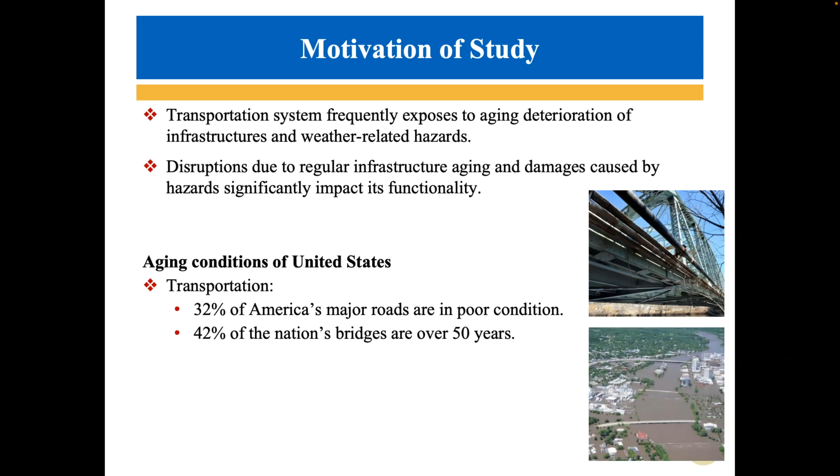So here I list 2 aging conditions of the United States. The first one is that 32% of the American major roads are in poor condition, and also 42% of the national bridges are over 50 years old. And also the focused hazard of my study is the flood. That is because flood is known to be the most frequent and costly climate-related threat. And it has resulted in 47% of natural disasters worldwide. And also it has influenced 2.3 billion people worldwide.

Flood also induces lots of adverse impacts, such as the direct damages of roads and bridges, and also the indirect impacts, such as the traffic capacity reduction, the travel time delay, the change of traffic habits, and the occurrence of traffic accidents. And last but not least is the occurrence of injuries and deaths every year.

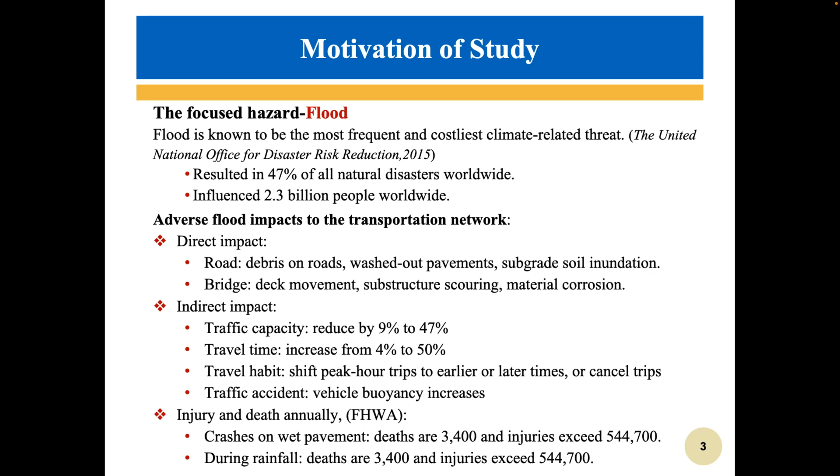So here, based on the aging infrastructures and the climate-related hazard that is flood, we want to manage the risk. The reason why we want to manage risk rather than the disasters is because managing risk is inherent to human development by considering the social and economic activities. So here we commonly do the three branches of risk management. The first is the risk mitigation, the second is the post-event recovery, and the third is the resilience management that can merge mitigation and recovery together.

Of course, the resilience management must be the most effective, but it will also need a lot of effort to do the optimization. So here I will first introduce the transportation network resilience. That is defined as the capacity of the system to absorb shocks, that is the robustness ability, and to adapt to changes, that is the redundancy ability, and to be able to return to a target network functionality level in time, that is the rapidity. And also the speed of the rapidity is dependent on the resource availability. So that is the last feature of resourcefulness. Since we want to do the resilience management, we developed the resilience management system, and here we would like to take two parts of actions.

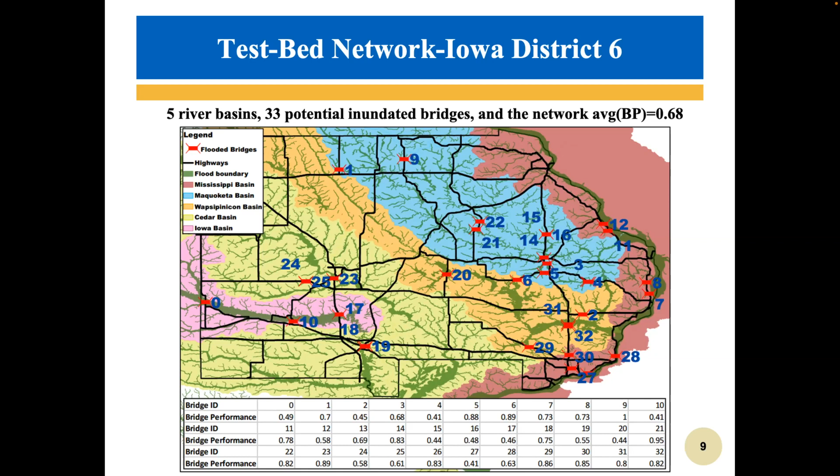We also simulated the bridge condition with the bridge performance value in the range of 0 to 1. So on average, the network resilience, or the network bridge condition, or the network-level bridge performance, is equal to 0.68.

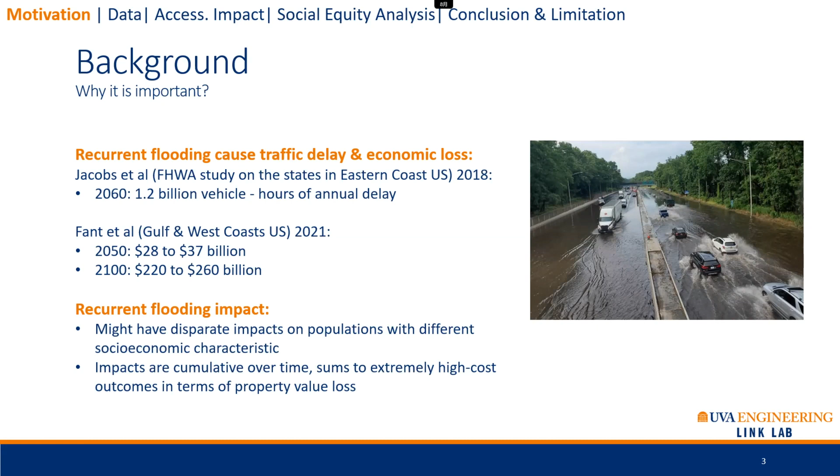There is literature in this field. Some studies focus on exploring accessibility change under extreme or large-scale climate events, such as hurricanes or disaster flooding. They found that under such events, service areas of critical facilities and emergency services reduced, and response time increased. For daily activities such as work, grocery, and education, these large-scale climate events cause delay or congestion and also lead to trip cancellation.

Some studies quantify the flooding impacts on transportation systems using various methods. They used hydrology simulation methods to understand the impact of climate change on the transport system. This body of work focused on exploring the change in accessibility to various destinations under large-scale climate events, because such disasters bring long-lasting consequences and are widely noticed.

There are also studies focused on recurrent flooding events, investigating the reduction in network-wide vehicle hours or the general accessibility reduction under such events.

For social vulnerability frameworks, the Centers for Disease Control and Prevention provides a social vulnerability index guideline. There are studies measuring the accessibility of transit for various locations, such as low-income jobs and hospitals, for socially vulnerable populations. But these studies are not specified in the context of small-scale climate events.

So there are 4 gaps that can be summarized from existing studies. First, the majority of these studies rely largely on simulation or forecast data. This data might not be sufficient to reflect the real situation in the transportation system. So in this study, we are going to use observed or crowd-sourced data.

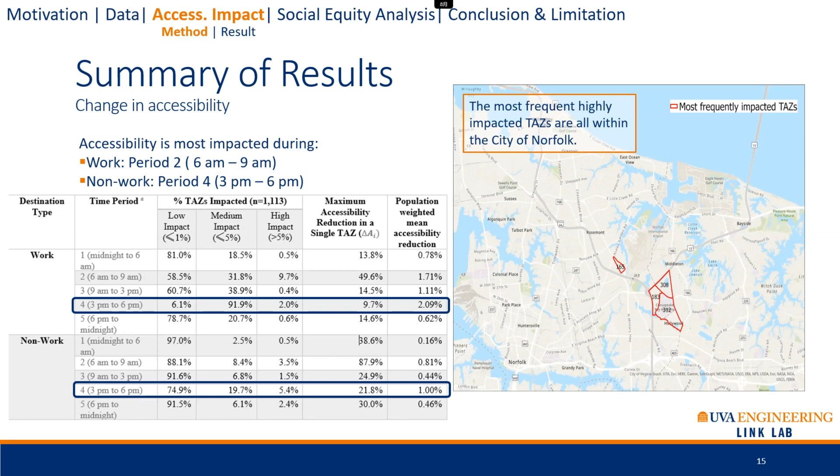So we have identified the highly impacted TAZs across different time periods, so we need to identify who is impacted during recurrent flooding. We're going to explore the socio-economic characteristics of people living in those highly impacted areas. The social vulnerability index framework was developed based on CDC guidelines. All the data for the first order parameters can be collected from US census data. Then the first order SVIs are summed into 5 categories to get the second order SVI.

And to calculate the second order and third order SVI, a min-max scale normalization method is applied as shown in this equation. So this is an example of how we calculate normalization, and all the normalized values for the first order variables will be added up to get the second order index, and similarly for the third order index, and a total value closer to 1 means more vulnerable.

Hi, hello everyone. I will present my research paper about the risk analysis of bridge damage assessment under the earthquake scenario and a case study in California. So, as we all know, in the US, bridges have been one of the most crucial components of our infrastructure. Therefore, as engineers, it's very important to understand the risks associated with bridges so that we may be better prepared during design, construction, and maintenance. If a bridge were to suddenly fail, lives could be lost, and there would be crippling damage to the local environment and economy.

Bridge failures can be due to a wide variety of factors. Broad failure modes such as design or construction errors are quite common. However, more localized modes such as fatigue, corrosion, and cracking may also lead to failure. However, one of the most devastating factors that can cause a bridge to suddenly fail are earthquakes.

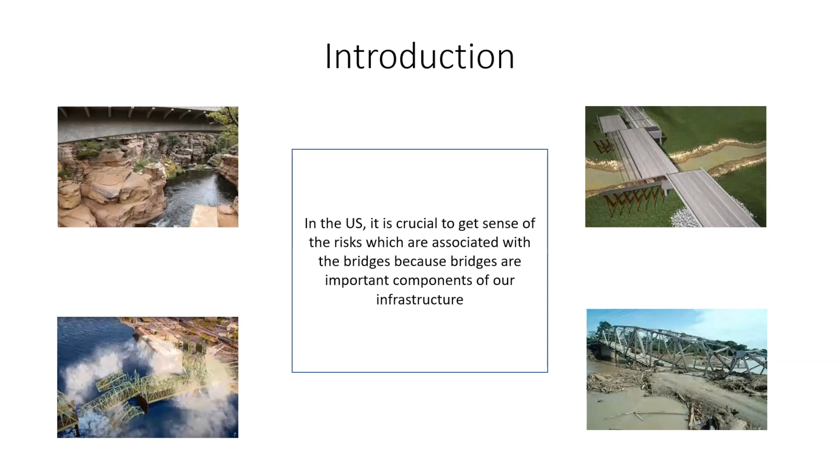During earthquake events, all surrounding infrastructure is put at risk, including bridges. By analyzing the risks that are associated with an earthquake-induced bridge failure, engineers, construction crews, public officials, and the public can become more informed about the causes and the effects of these events. The purpose of this report is to develop an analysis method that can be used to quantify the risks associated with bridge damage due to earthquakes in California.

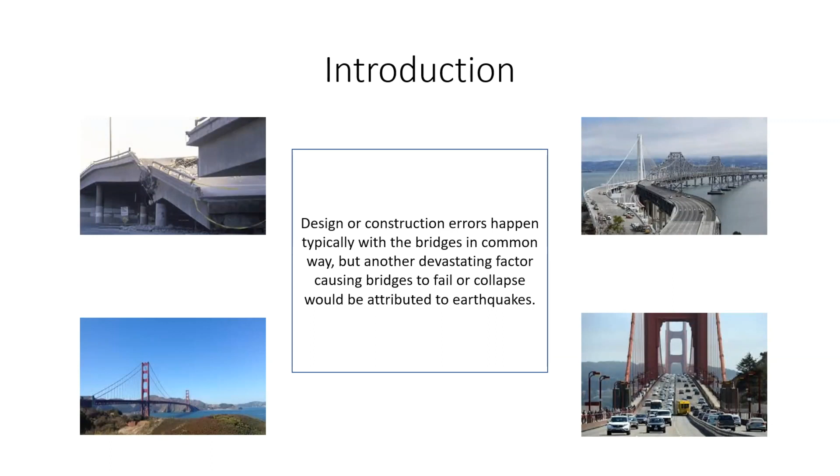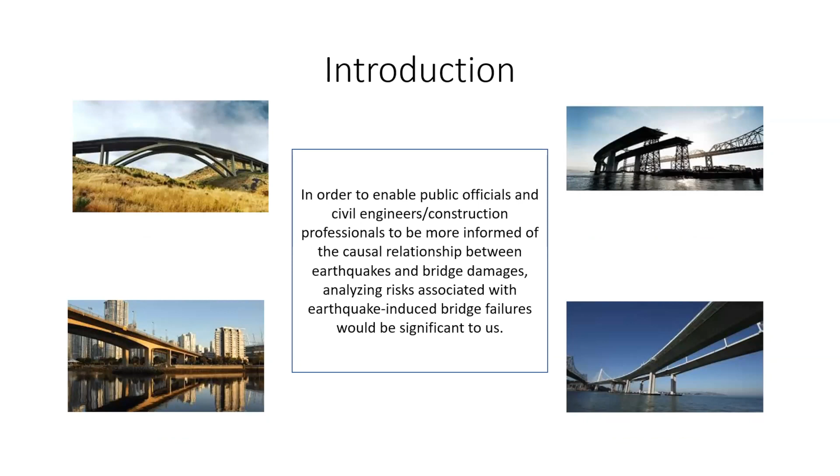So, as we can see from the introduction part, there's a gap between how to quantify the risks with the bridges under the earthquake event in California and the current literature, how we can use the proposed new method to quantify the risks with the bridge damage in California. So in our methodology, we will try to use the event trees and sensitivity analysis, fundamental objective hierarchies, and the means objective networks as our prioritized and selected approach for quantifying the risks associated with bridge damage following earthquakes.

So a thorough forensic analysis was conducted. The results of this analysis would allow multiple stakeholders to make decisions as to how to best assess the risks that are associated with bridges in California being damaged due to the occurrence of an earthquake. So as we can see from the first portion of event tree in the methodology, an event tree is a commonly used tool in risk analysis and studies. It is an analytical diagram that is used to examine an initiating event followed by a chronological series of uncertain events and quantify their associated probabilities of occurrence and the consequence.

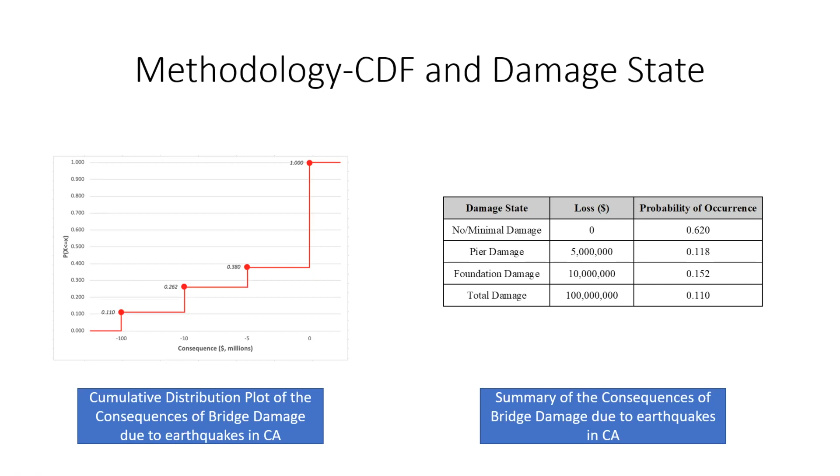Proximity was varied in a way that made it more likely that a bridge would be close to an earthquake, given the size of California state and the location of the San Andreas fault. In addition, only the medium and high earthquake magnitudes were varied, since a low magnitude earthquake will not impact the likelihood of total damage. Furthermore, bridge condition was varied in a way that simulated the degradation of bridge condition over time. By altering these variables, it can be determined which event will play the biggest role in determining the risks associated with total bridge damage due to earthquakes in California.

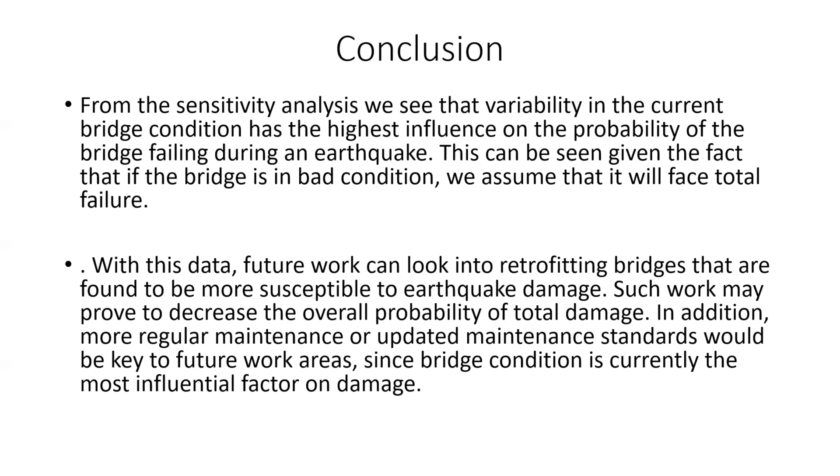So, in order to mitigate the risk of all bridges, it would fall on the shoulders of government officials and engineers to decide how to best scale this strategy up. Decisions would need to be made as to which bridges get retrofitted and inspected first. These decisions could be made based on traffic volume, age, as well as potential cost of reconstruction.

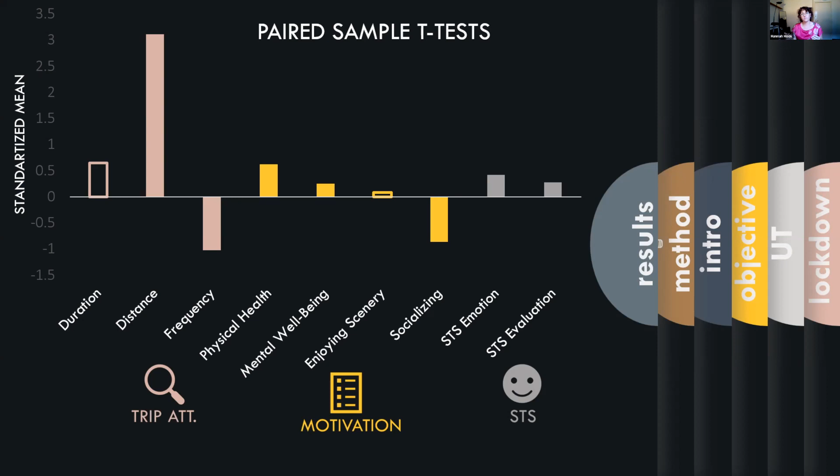So for both satisfaction with travel components, satisfaction increased over the course of the pandemic. So maybe people were incorporating them more into their routines, and then getting more satisfaction over time out of their undirected travel trips.

Some people shifted their modes to cycling or other, which included all other types of undirected trips, not just other active undirected trips. And of course, some people didn't participate in undirected travel at all, either at the beginning or at the end of the pandemic.

So we were able to identify 5 behavior profiles based on the modal shift: those who kept the same mode, those who began undirected trips, those who stopped undirected trips, those who changed their mode, and those who did not participate in undirected travel.

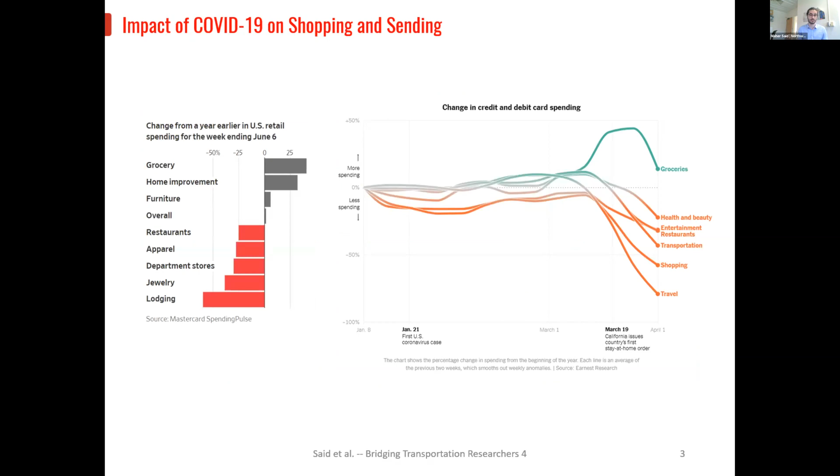The goals of this research is to examine household spending and purchasing behavior during the evolving stages of the COVID-19 pandemic. We were mostly focused on the period between December 2021 to March 2022, which was the phase when things were kind of reopening at that time, and people were going back to their lives. Actually, that's December 2020 to March 2021.

We want to provide insights regarding changes in spending across that time and what factors were affecting spending, and analyze purchasing behavior across different channels, because people were doing a lot of deliveries, getting into pickup, and we wanted to understand how sustainable any of those systems were, whether they're here to stay or already gone at that time. We'll get into that as we show the results.

This is part of the UTC Telemobility study, which is huge and actually still ongoing. The last date I show here is March 8th, but we're still collecting data. For this study specifically, we're just focused on two tiny bits of the data we collect as part of the UTC, specific to expenditure.

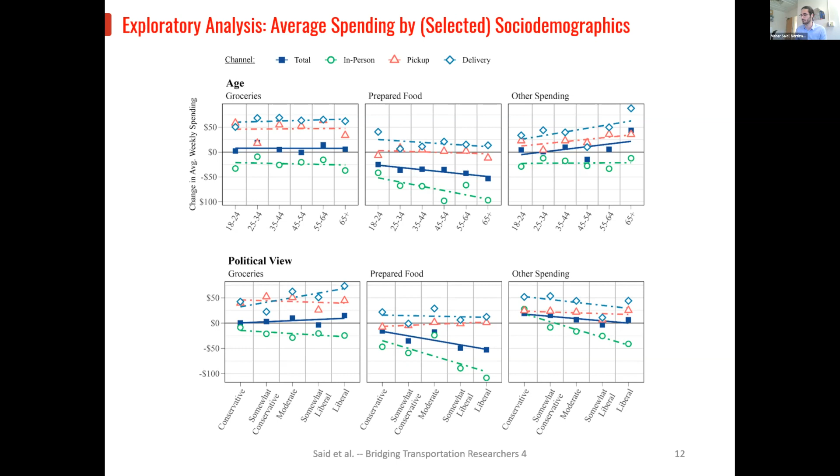So regarding modeling, we needed to show the information that we just showed, but controlling for a lot of the aspects that are not controlled for in simple averages. So we chose the hurdle model to resolve the issue of a lot of zero responses, because not everyone is spending week to week on a number of these categories. So in hurdle models, we're going to see the first arm of the model being the binary arm, which shows whether someone spent or did not spend during that week any amount. And then a continuous arm that shows, for those who have spent an amount of money, how much have they spent?

And this is just the formulation for a hurdle model. It's basically a logit model for one arm and a linear regression for the other.

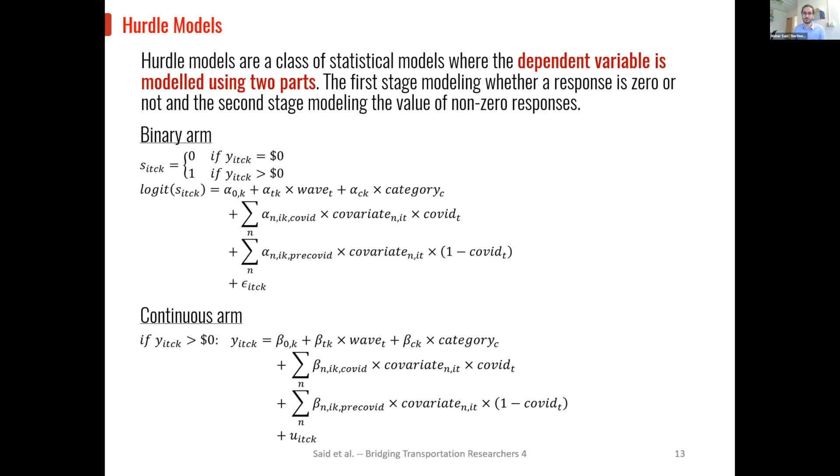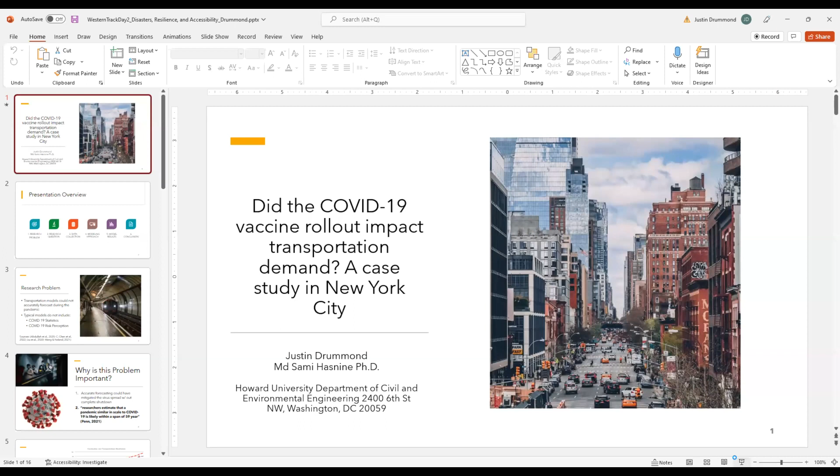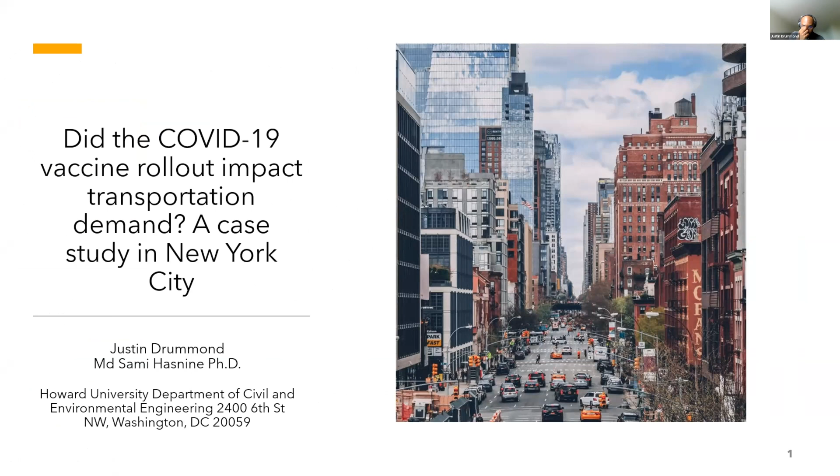Okay, excellent. So yes, I will be presenting on whether the COVID-19 vaccine rollout had an impact on transportation demand, a case study in New York City. I also did this research along with my PhD supervisor, Dr. Md Sami Hasnine.

An overview of our presentation today. First, we'll be talking about the research problem, followed by the question that came from this problem, our data collection process, our modeling approach, followed by the results and a conclusion.

So the research problem: as mentioned before, transportation models were not able to accurately forecast during the COVID-19 pandemic. There was an introduction of new factors besides the typical factors such as travel time, travel cost, travel distance, and socioeconomic factors, which go into typical mode choice and travel demand models.

For instance, during the pandemic, even if public transportation was the cheapest mode of transportation offered or was completely free, there was obviously risk perception of the pandemic influencing people's decisions. So the typical factors influencing people's decisions were affected by the pandemic, and the previous models were not taking into account these factors.

So why is this problem important? Well, accurate forecasting could have helped mitigate the spread of the virus. Not only does the virus have an impact on transportation, but transportation also has an effect on the virus as well. If more people are traveling, we can expect that the virus is going to spread more. So being able to accurately forecast during a pandemic would be important to help implement policies to mitigate the spread of the virus.

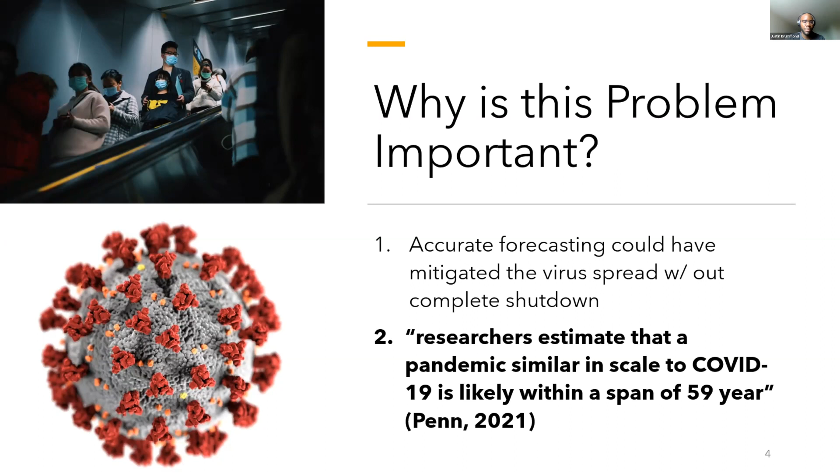And also research suggests that a pandemic with a scale similar to COVID-19 is likely to happen within the next 59 years. That's an estimation from a study from Duke, but as population is growing and as other things are going on, it's estimated that we would see more global health crises. So it would be reasonable to use the information that we've gotten from COVID-19 to help improve our transportation models in the event that there's another pandemic.

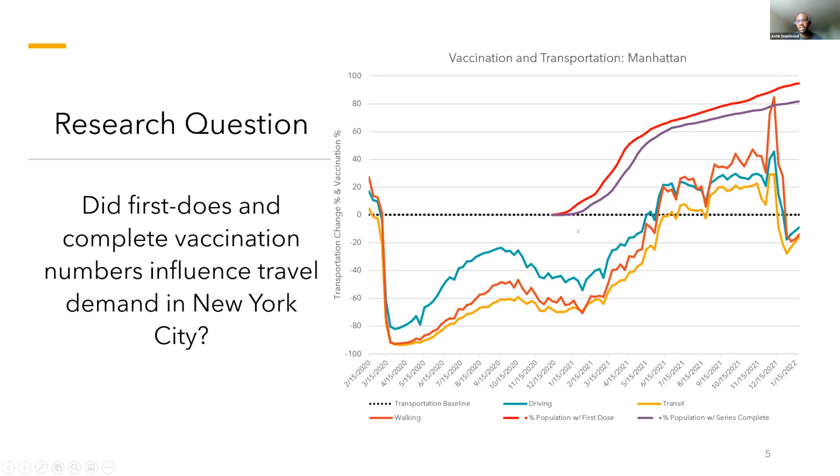But in late 2020, we saw that vaccinations were released and vaccination numbers began to increase, and we see that transportation numbers also increase. So it would be pretty easy to assume that just because vaccination numbers were increasing, this had a direct impact on travel demand. But it's possible that these two variables are correlated, or that there's another factor which is influencing both of them. So the nature of our study was to examine not just if vaccination was influencing transportation, but also how much, and how much relative to other factors.

So we collected data from a variety of sources. We not only looked at COVID-19 vaccination numbers, but also COVID-19 tests, positive tests, hospitalizations, deaths, as well as searches on Google for COVID-19 related terms, COVID-19 policies, weather data, and trip purposes from Google community mobility reports. We used these as predictors for our dependent variable, which was driving, transit, and walking demand from the Apple Mobility Trends report. We modeled all three modes separately, both pre-vaccine and post-vaccine, so there was a total of 12 models estimated in the study.

For the sake of time, we won't touch too much on our modeling approach, but we used ARIMAX modeling, and we estimated parameters for beta and standardized them so we can interpret them and compare the influence of the various predictor variables on one another.

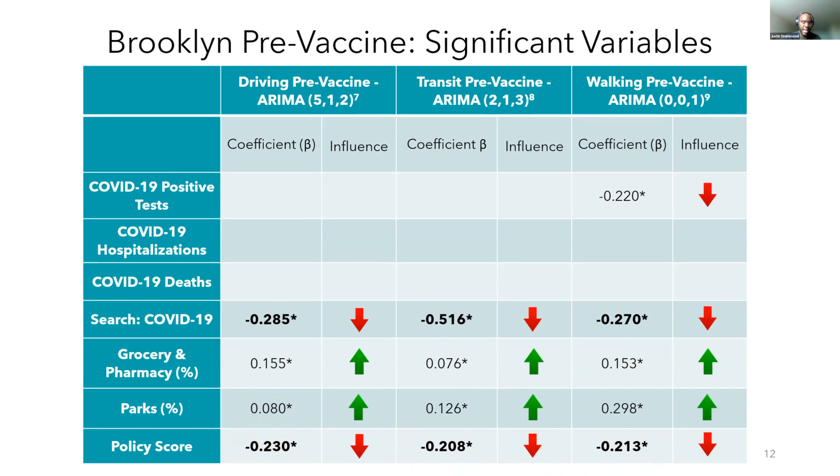So again, when we look at the pre-vaccine scenario for Brooklyn, we see that COVID-19 searches and policy score were pretty much two of the strongest influencers. But what we will notice from the difference between Brooklyn and Manhattan is that in Manhattan, the parameter estimations for the policy score were significantly higher than those of Brooklyn. And we're going to discuss that if we have time at the end of this.

So this again would seem to indicate that the implementation of stronger policies was discouraging travel, but also that as the policies were being lifted, there was less of an influence of the policy, of course, on travel demand, which explains a lot of the increase in travel demand as we saw in the graph earlier. So again, vaccination and COVID-19 statistics were not as significant predictors as we expected.

COVID-19 policies and searches for COVID-19 on Google seem to be strong influencers, and we see that in grocery shopping a lot of the models, as we see here, were statistically significant for all modes, which makes sense because people need to go grocery shopping. It's an essential form of travel. So we also found that vaccination was statistically significant in more cases in Brooklyn than in Manhattan, but policy had a stronger influence altogether in Manhattan.

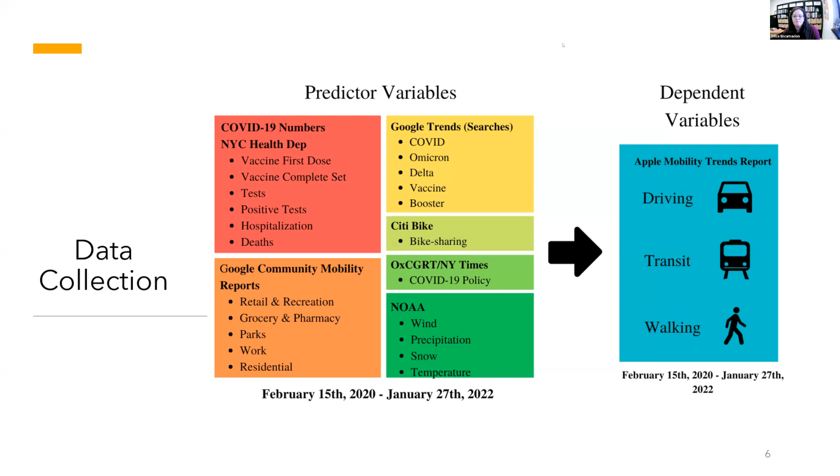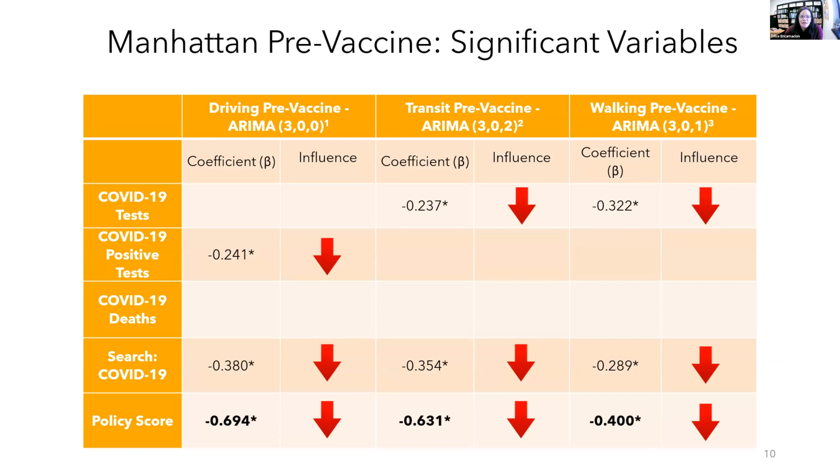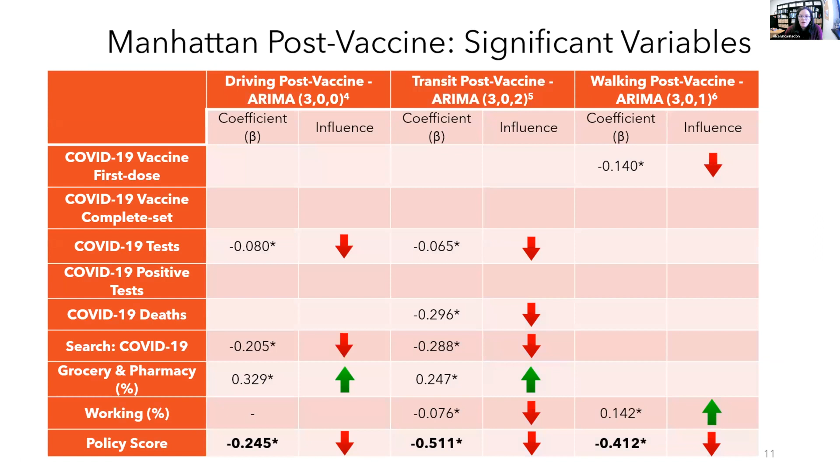I also wanted to ask about your results. You see that there were significant result differences between Manhattan and Brooklyn in terms of modes. Vaccine was influential in both, in increasing, not as much as the policy, like you mentioned. But in Manhattan, it was mostly walking, while in Brooklyn, the influence was mostly driving and transit. Could that be explained just because of the normal use of these modes in those areas?

Yeah, that's a good point. That could possibly be an explanation. Another explanation, and I forgot to mention this, but one of the limitations of this research was that Apple Mobility Reports data only provided information for people making requests for navigation on Apple Maps. For instance, the driving demand, most people making requests for driving are likely Uber drivers or ride-hailing services.

So the data itself, just being honest, may not have been the most reflective of the entire population, because it was only Apple data, and we understand that not everyone has Apple devices, and that may constitute a niche group, especially those making requests for travel. When you try to publish this, you have to acknowledge the limitations, but it is random. It's a random sample. It's still a sample.

Yeah. And I use Apple every day on my commute to work, even though I know the way, but I like to see the time that it's going to take me, and I drive, I live in a city where everybody drives. So yeah, it has limitations, but I don't think it should prevent you from, I mean, it's a very interesting and very clever use of available data to get some insights. I also think there are a lot of other implications that you didn't discuss. I'm sorry I didn't take notes, but it's really, really cool.